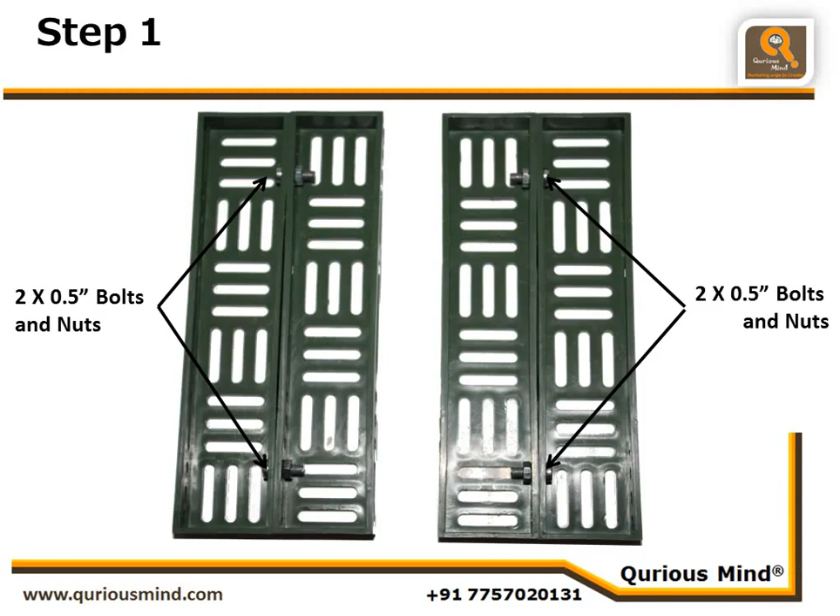Step 1 of the design. We wanted two C plates connected together to form the sides of the base. Here you can see we have two C plates connected together here and two more here to form two sides of the base.

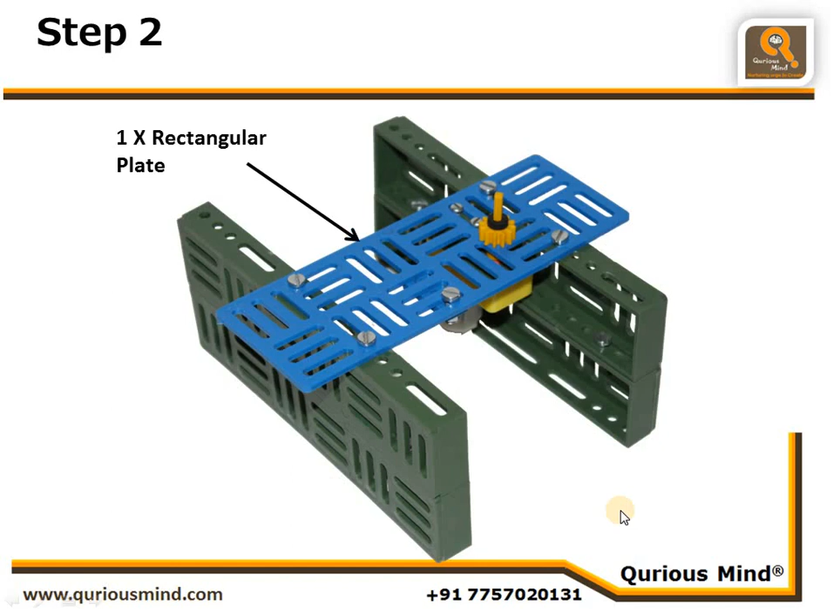Let's go to the next step. In this step, we are going to connect one rectangular plate to two assemblies of C plates we created in the last step, using two nuts and bolts shown here. We are also going to connect a motor with the motor shaft, and onto the motor shaft we are going

to mount a small gear and keep it in place using a shaft lock. We are also going to create a hole to mount a big gear, using one flat rotator and one bolt. If you see here, this is not exactly to the edge of these slits, it is slightly away from the edge. The exact distance you will understand when you put the big gear alongside the small gear here.

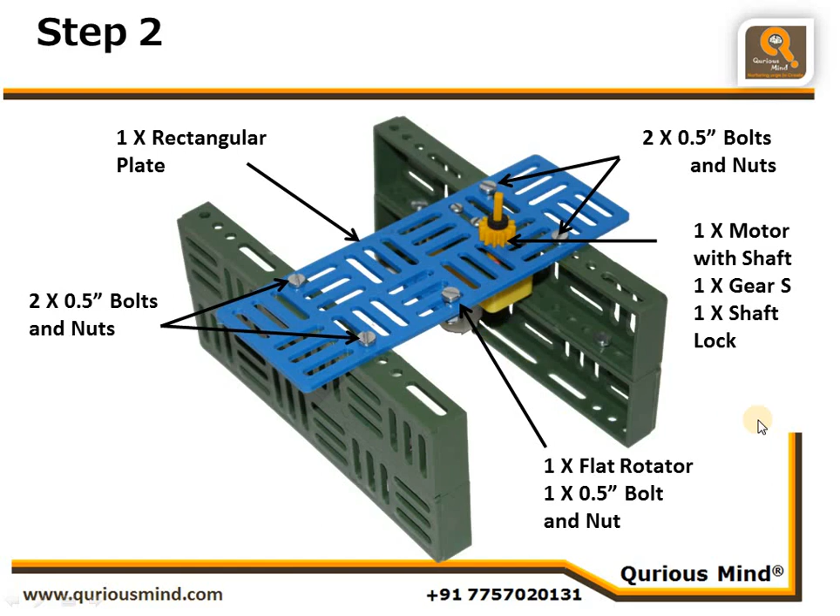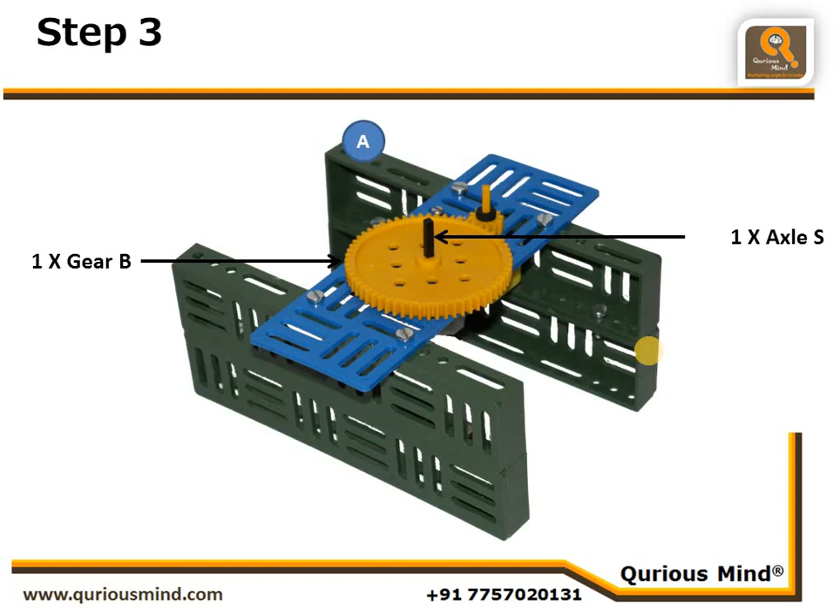Let's go to the next step. In this step, we have connected one axle and one big gear. The axle we have inserted through the hole which we created using the flat rotator in our earlier step. This axle is locked from below using a shaft lock. We are going to call this assembly A.

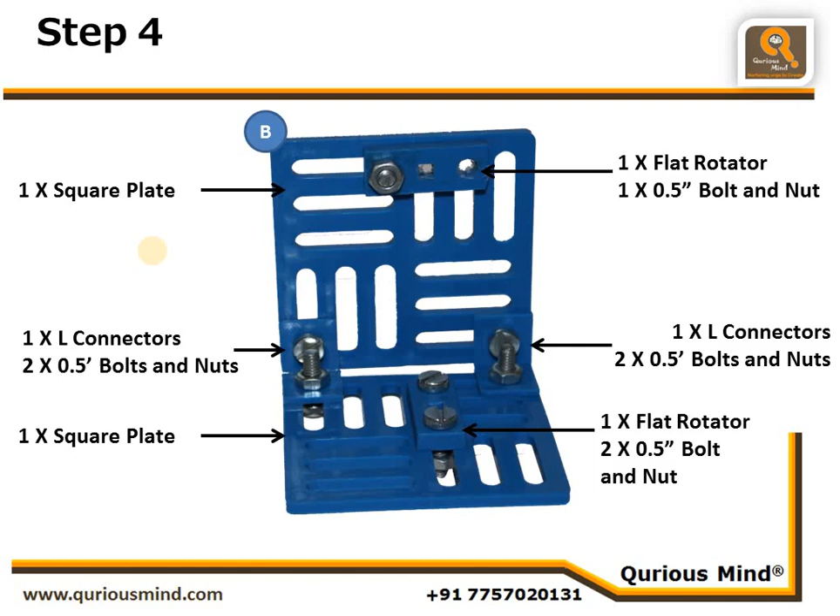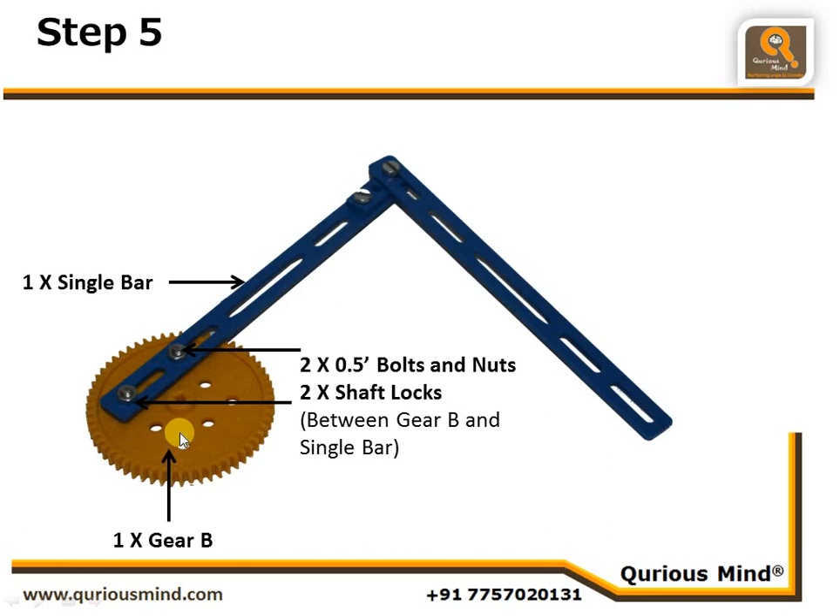If we do not use those shaft locks, when we tighten these nuts and bolts, this single bar bends. We don't want that, and hence we have used two shaft locks below the single bar and just above the big gear. We have also connected one flat rotator at the end of this single bar and created a circular hole. And we took a single bar and attached it to this single bar using a 1-inch bolt which is loosely coupled, so this single bar can move freely. We will call this assembly C.

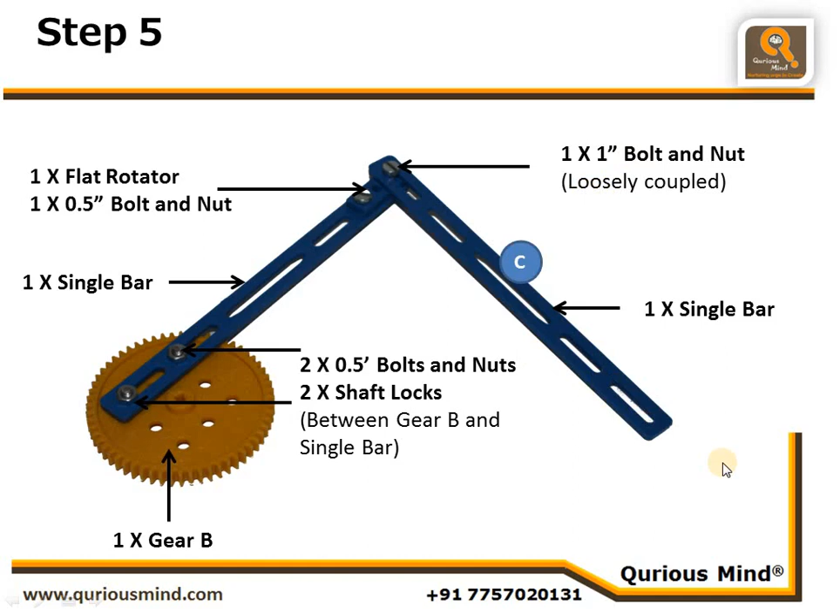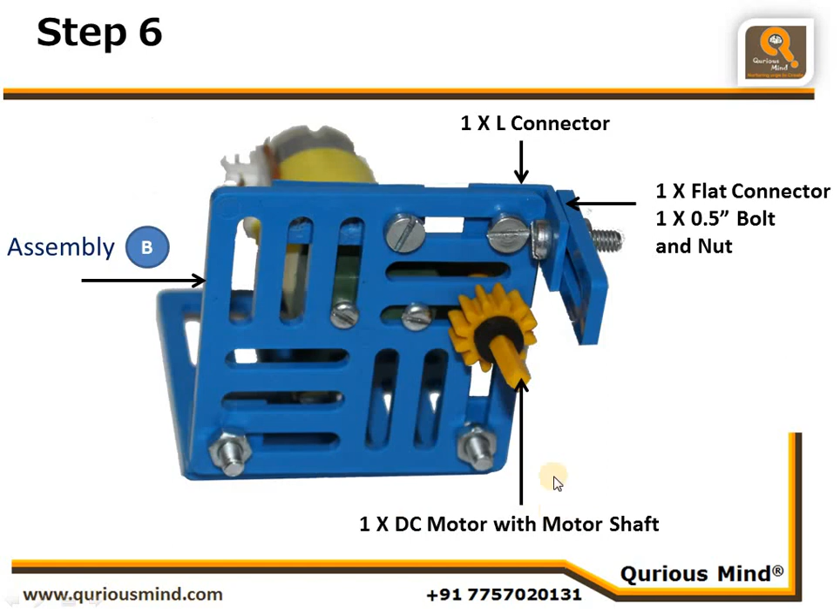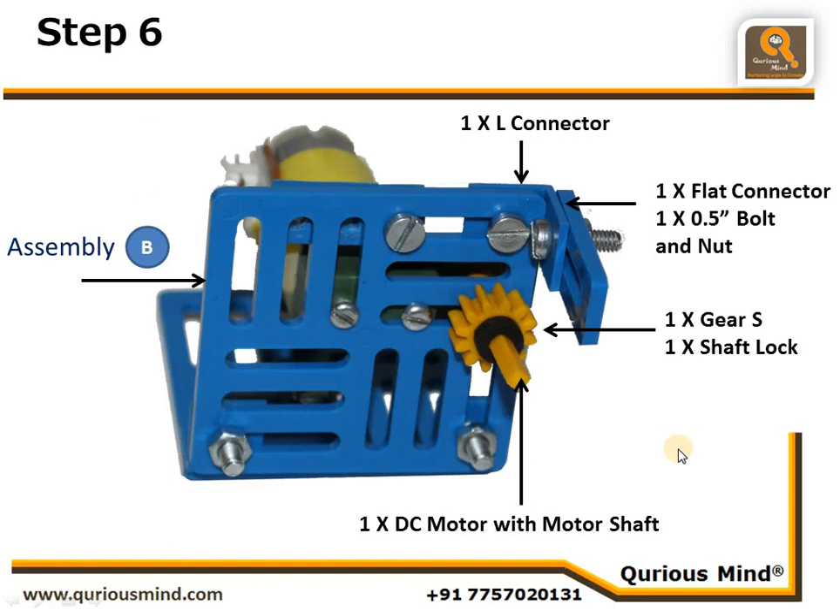We are also connecting one DC motor with the motor shaft, and on top of that we have mounted a small gear and secured it in place using a shaft lock. This we will call assembly D now. Let's go to the next step.

In step 7, we are going to mount assembly C over assembly D. So this is our C assembly, which is the big gear and these two single bars, and we are going to mount it on our assembly D, which we created in our last step, using a small axle and two shaft locks. One shaft lock on this side, one shaft lock on the other side of the axle, so that the axle is secured in place.

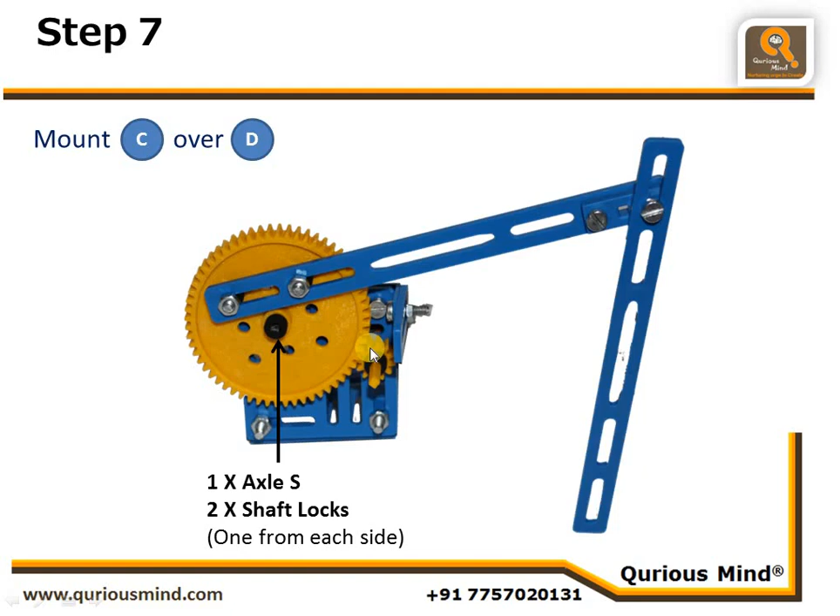Ensure that the gears are perfectly meshing. They are not over meshing or they are not away from each other. We'll call this assembly A. Let's go to the next step.

Now in this step, we are going to mount our assembly E, which we created in our last step, over assembly A, which we created in our second step. We are going to connect two spacers on the axle which was there on this big gear. And after those two spacers, we are going to put our assembly B on that and secure it with the shaft lock. Now this completes our robot.

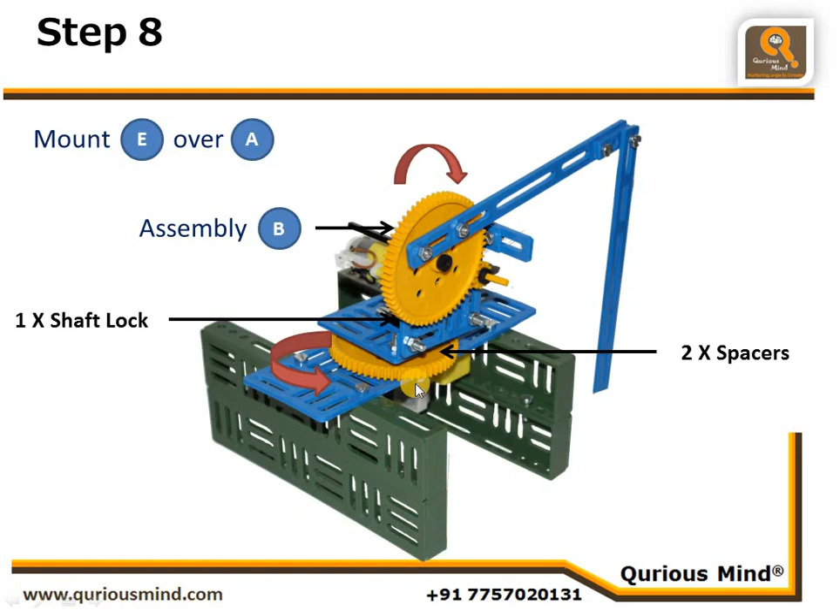What is 2-degree freedom here? If you see, this mast rotates horizontally while this assembly goes up and down. So we have one rotation here and we have the second rotation. In the same robot, one assembly goes up and down here, and the same whole assembly also rotates right left 360 degrees. And that is called 2-degree freedom.

What did we learn from this video? We have built a crane from the design which we created in our last video, and we have understood what is 2-degree of freedom. We will come back with another video with another design. Till then, bye bye.